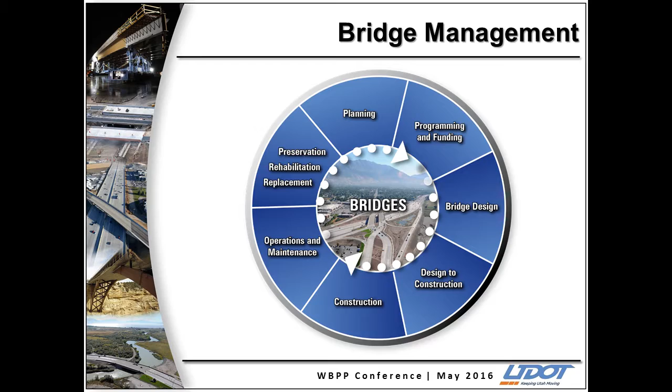So when we first started, Carlos asked me over and over, well, how much money do you need? What do you need? What do you need? And so we went rounds and rounds about how are we going to develop this and how are we going to get there.

So really within the bridge management, what was the objective? We needed to look at each bridge, preserve bridges for that whole life cost. It's almost like creating that plan for every structure. Operate in a financially sustainable manner. Everybody knows you can't maintain an inventory at 100% of its bridge condition. We wanted to improve the performance on a long-term basis, but we also needed to evaluate, with the funding levels that we have, what do we think the outcome will be of those bridges based on the deterioration of bridges.

Bridges deteriorate. So we went back, we looked at our inventory, and the strategy is, with the number of bridges we have, the whole goal would really be to work on every bridge over a 20-year period. What that ends up being is we'll be working on 100 to 120 bridges every year based on our inventory numbers. We also wanted to manage that in a state of good repair, really trying to make that more proactive approach than a reactive approach.

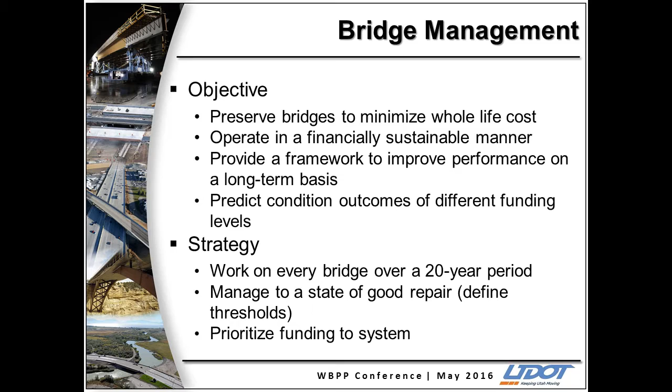This is part of the cover of the annual bridge report. It's all on the website. Like I was saying, we created a bridge management manual, which is also on the website. It has a lot of information on how we manage bridges, our emergency planning, and our entire inspection program. If you're looking to make changes within your group, I highly recommend looking at it. We spent a ton of effort on it.

We do the annual bridge report for our region directors. This is something I would give to Carlos. It's that snapshot every year of our bridge inventory, telling you the number of bridges. The state-owned bridges, we have about 1,900. The local agencies, there's 140 of them, and we have about 1,000 bridges in that category. So it really gives them a breakdown. If they get any questions within their region, they can come here for bridges.

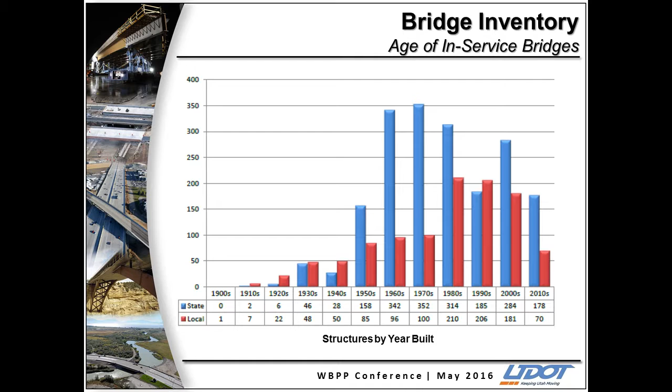This is the breakdown of age of in-service bridges. A lot of states in the past have always managed bridges based on age, and we were really trying to get out of that mode. Just because a bridge is 50 years old doesn't mean it needs to be replaced. This is a snapshot showing the 60s and 70s when most of the bridges were constructed in the state.

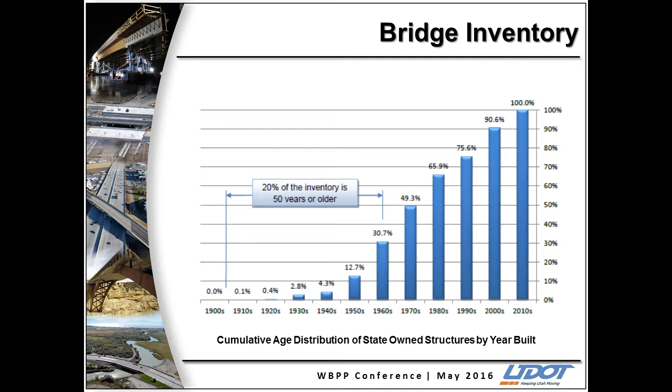This is more of a cumulative age distribution. Basically 20% of our inventory is 50 years or older, and that's based on the state system. But as each year goes by, that's going to increase dramatically. So you can see why we wanted to get away from this age-based approach—not just replacing a bridge because of its age, but really evaluating its condition.

So the approach really became preservation. How are we going to maintain these? That's really the goal now.

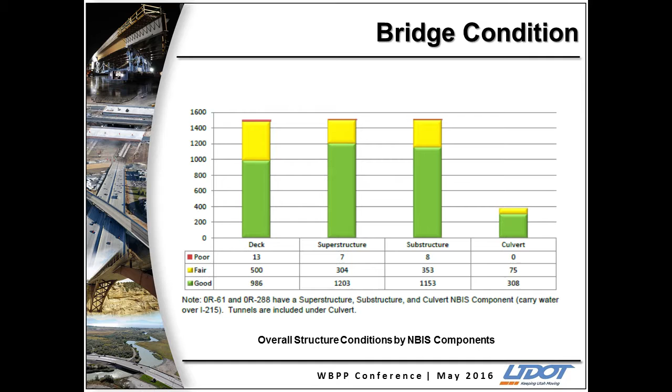The locally owned system is really similar. If you look at their system, they're about 4% in the deficient category. Obviously they need to be in a preservation mode of management as well.

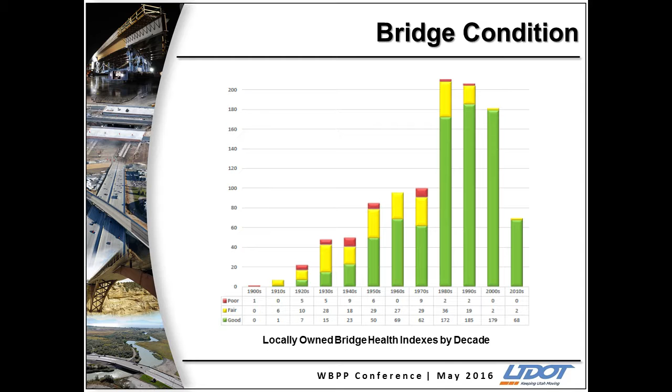So we really took this approach from the management strategy. We classified how many good, fair, and poor bridges we had. In the good condition, we want to preserve and extend that service life, looking at each bridge and what preservation treatment would make sense for it. For fair, it could be preservation, but probably with more rehabilitation activities or treatments happening at that time. And for poor—that's the 18 bridges I mentioned—we were just going to go out and replace them.

As Ivan said, we're in really good shape when it comes to the actual condition of our structures.

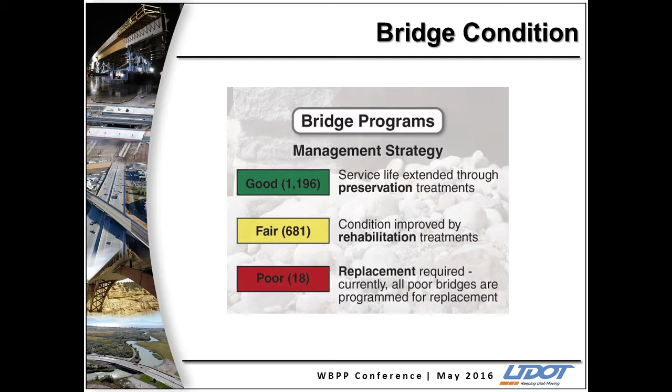So we really tried to develop the planning aspect within bridge management, addressing existing in-service bridge inventory, but also prioritizing funding, because at this time we were only getting $20 million into the whole bridge program, which had to be used for preservation and replacement. This money is just for the bridge program itself. Capacity projects are treated separately, so bridges within capacity projects are funded through that project and not through our bridge program.

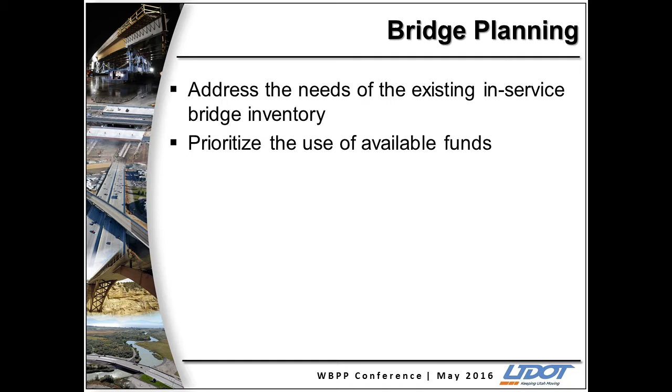So again, we tried to look at the whole process. We came up with a Bridge Health Index, which measures the overall condition of the bridge with weighted elements. We established a prioritization process, and within that Bridge Health Index we evaluate importance factors, load rating, criticality, and the vulnerability of each bridge. We looked at deterioration models based on our inventory, did life cycle cost analysis and risk analysis, and we also work with our regions to combine projects whenever it makes sense.

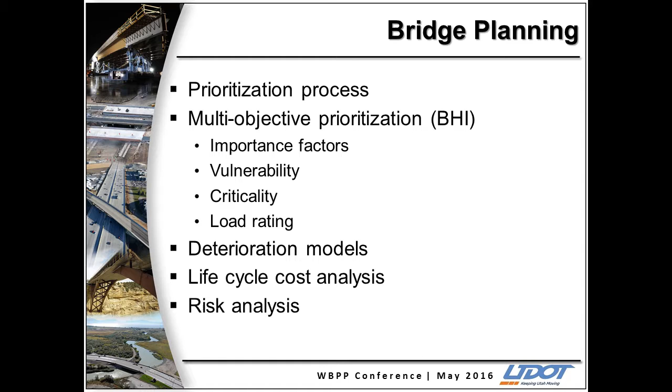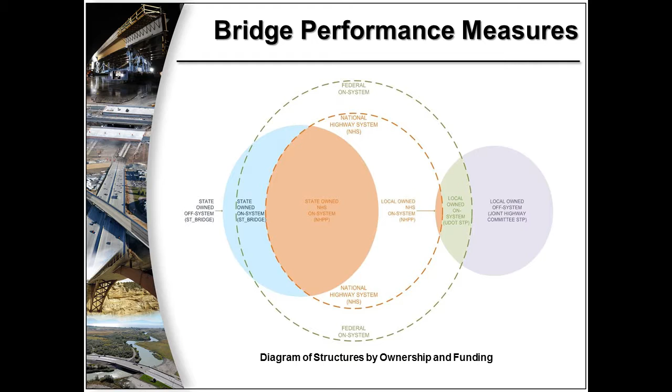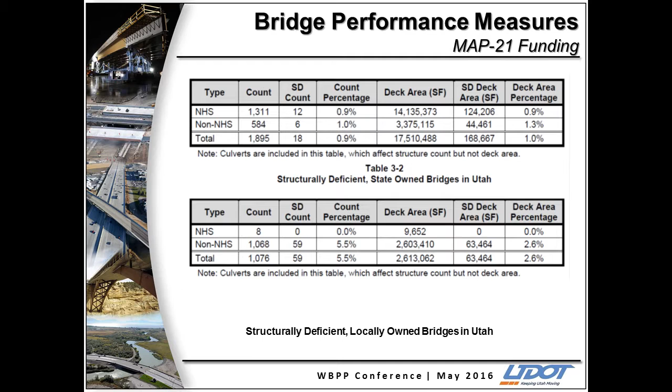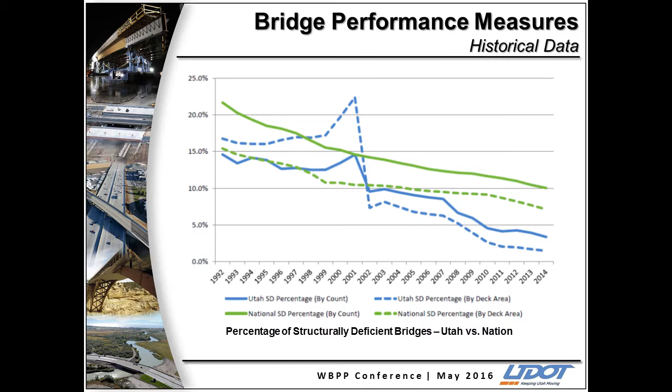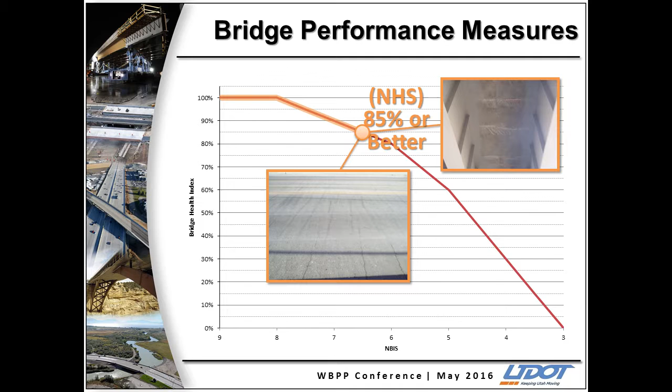So for the state system, we said okay, some of those roads are not traveled as much, they're not necessarily the interstate. So we could have this range at 80, 85, and that was something Carlos has shown where we don't necessarily know, but based on engineering judgment, on where we are with our bridge condition, we think that this is reasonable.

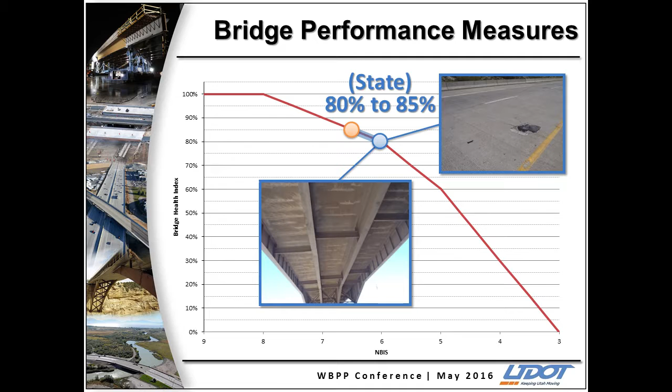This is more the satisfactory condition. You can see there's a few potholes, moderate cracking, some delams, but overall it's still in good to fair condition. But since we also look at the local federal aid system, we kind of lowered that a little bit. They're not as traveled roadways, so we said okay, 75 to 80%. It's still satisfactory condition, before it really drops off into deterioration, but there's probably more potholes, more cracking, and things shown.

So this is how we've kind of defined those performance measures. We're still working on them, but we figured that this would be a really good start for our program.

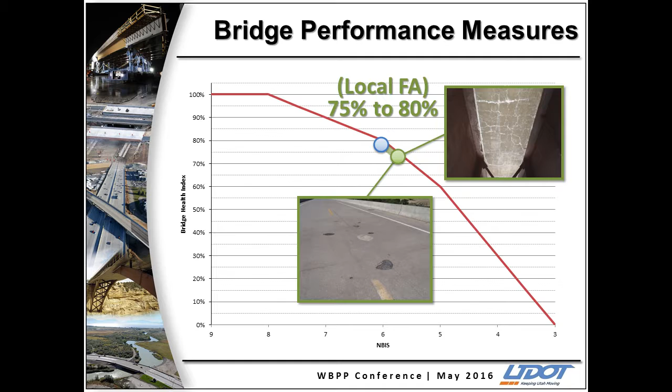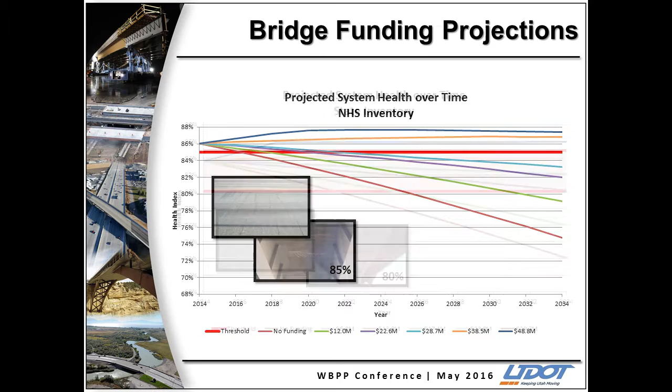So that was the NHS. Same thing for the state, but if you remember I gave a range, so the red would be the range for that. And then this would be for the local federal aid system. So we went through that process, looking at different scenarios on where we thought we needed to be within the bridge program.

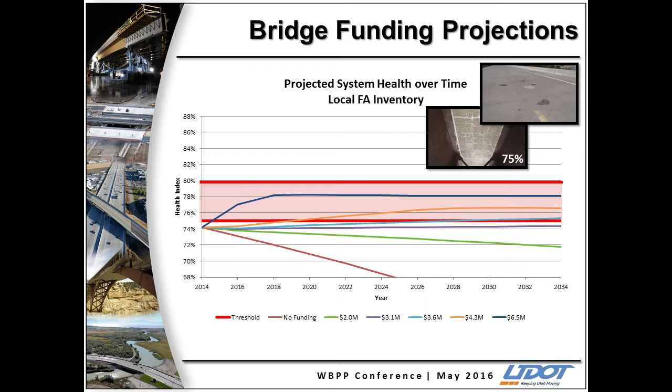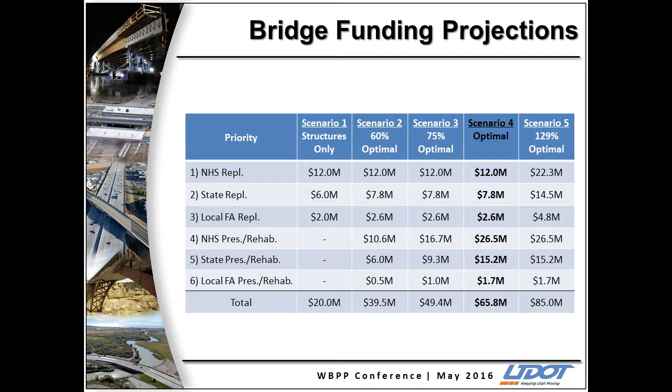So we went through different scenarios of where we were spending and what would be optimal. Based on those deterioration curves and projections, this is how we ended up distributing the money for our bridge program in scenario 4. Each year, as we get up to it, we'll eventually be getting about $65 million into our bridge program. Some of this money will come from capacity projects, so the money we get from the bridge program is probably end up being about $50 million.

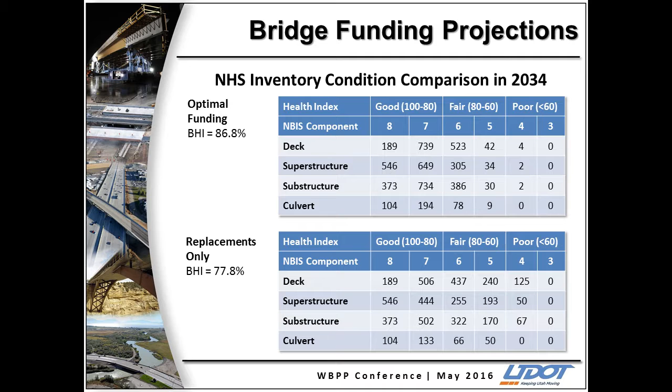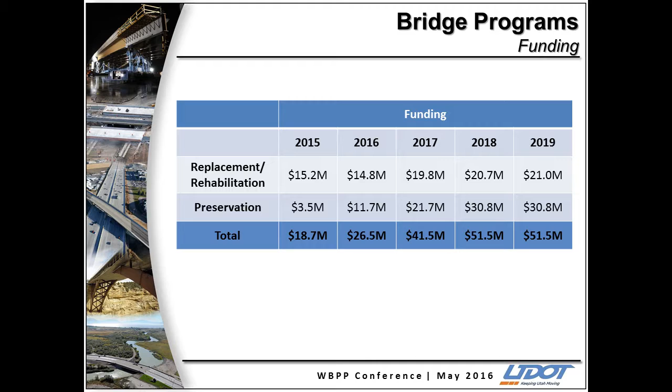So just getting into some of the bridge programs we have. Basically the funding we get has two programs - the bridge replacement and rehab program, and the bridge preservation program. We run our structure inspection program out of the money we get from replacement and rehabilitation. As I said before, we inspect all the bridges in the state, including for the locals - they're not responsible for that.

In our load rating program, we had an $11 million program where we basically load rated every bridge in the state over the last 5 years. So it'll be more of a maintenance program at this point to maintain those load ratings.

With the bridge preservation, there's a bridge maintenance program where we use procurement contracting to get things fixed quickly, helping our maintenance division get potholes fixed correctly. We have a scour program - we take part of the preservation funding, setting aside probably $500,000 a year to address bridges that are scour critical. We have 13 left, so over the next 4 years we'll address all the needs of scour critical bridges in the inventory. We've also developed concrete deck protections, setting aside a certain amount each year to protect bare decks, or painted steel protection systems where we go out and paint bridges that year, and same with parapet replacements and things like that. So we're really trying to do these sub-programs within the major programs.

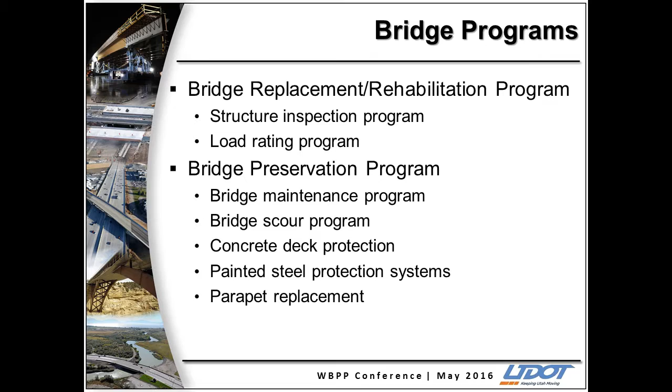And that's all I have. That's where we are with bridges in Utah. Thank you.